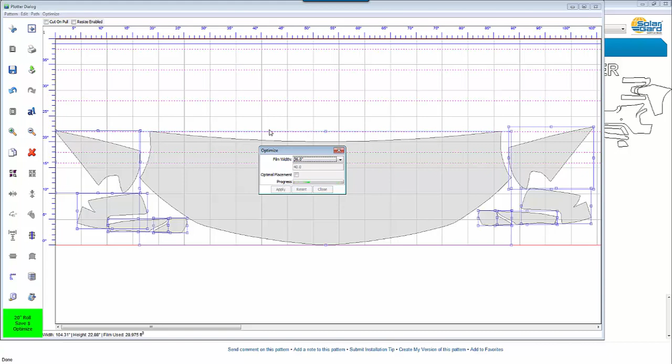So to do that, you just go to the Optimize and then click on 36-inch, and we'll just uncheck this because it takes a little bit longer for optimal placement, and click Apply, and it will optimize it for a 36-inch roll.

So to optimize this, it's as easy as just selecting the patterns, the width, and click Apply. Okay, we'll close out of this and then close out the plotter dialog.

And let's say we're going to cut this bumper here. So again, I'll click and drag a box around the bumper. Hit the cut button, it pulls it into the plotter dialog window. And as you can see, all of these sensors are included in here.

But what happens if you have a vehicle that does not have these sensors? Well, it's pretty easy. All you do is just click on the pattern and go over here to Ungroup. Click Ungroup, and what it does is it separates each part out individually.

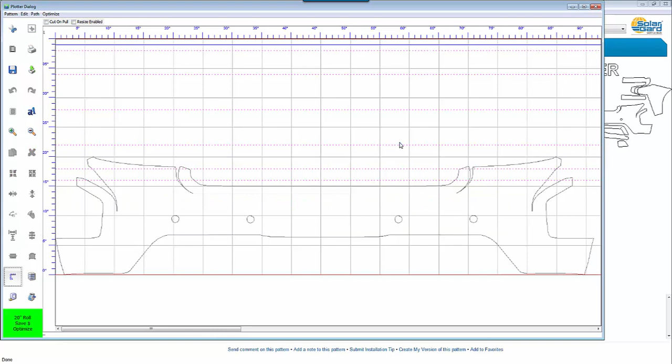So you can just click outside here, and then we'll click on the sensor there, and if you hold your Control key down, you can select multiple pieces. So we'll select all these pieces here.

And then we'll just hit the delete button, and it deletes them from the bumper.

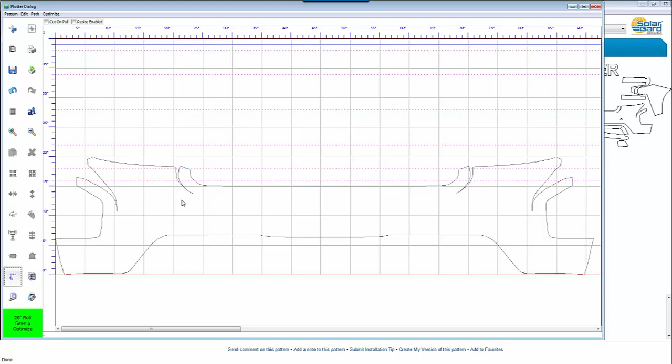Let's say you want to cut this pattern, but you only have an 18-inch roll. So we'll select it, then go down here to the Path Editor and click on that, which pulls it into the Path Edit window, and in here you can adjust it however you want.

So we'll take a ruler, click on here, and pull it down. For an 18-inch roll, we're going to go probably somewhere around 16 inches, which is right about halfway in between those two boxes.

So we'll go up here to the slice function, click on one side and then across to the other side, then go over here and do the same thing. We have to go back up and select the slice function again, click here and then click here, and that slices it there, so now we'll click apply.

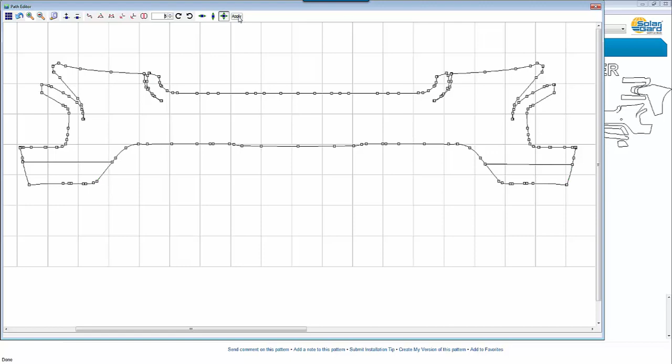And when it comes in, it's grouped, so again you're going to have to go in and ungroup it. So we'll ungroup it here and then pull these pieces out.

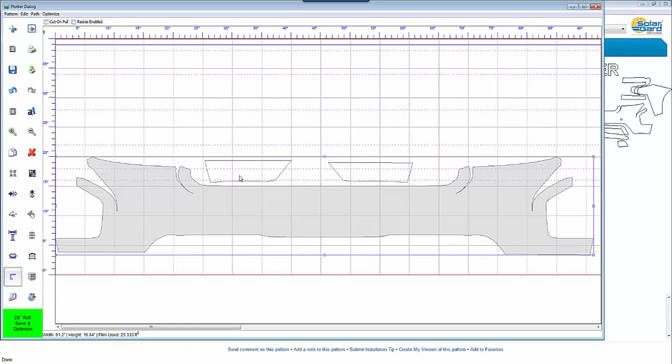And if I click on here, down here, as you can see, the height's 16.64, so it will fit on an 18-inch roll of film. Okay, so we'll close this out here.

Okay, so let's say you have a customer that wants to have the patterns wrapped. In other words, they don't want to see any seams in a pattern, so they want it wrapped around the edges. So let's say, for instance, on this hood here. We'll grab the hood and hit cut. Basically what you want to do is enlarge this so that it can wrap underneath the edges of the hood. So you go over here and click on the outline function right here.

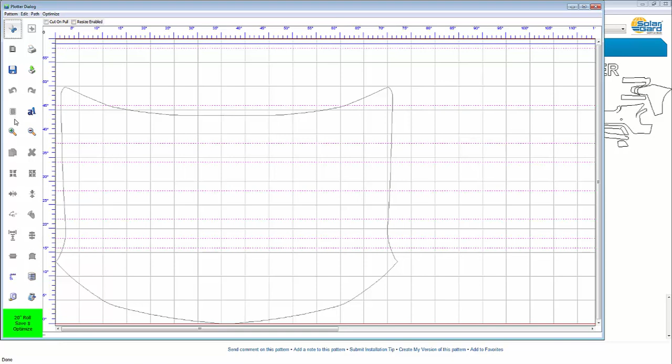In this case, it's going to enlarge it by a ½ inch, and you click wrap, and what it does is rather than throwing an outline around this, it just makes the image a ½ inch bigger all the way around so that you can wrap the edges.

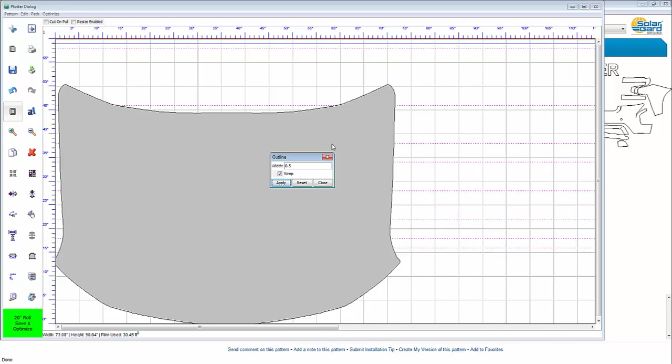One last little trick I'd like to show you. If you have dealt with paint protection before, you'll know that whenever you cut a pattern, a lot of times it's really difficult to see where the pattern has been cut. So when you try to weed it, that is separate out the excess away from the pattern, it can be really difficult, and sometimes you can even tear into a pattern and ruin a piece of material.

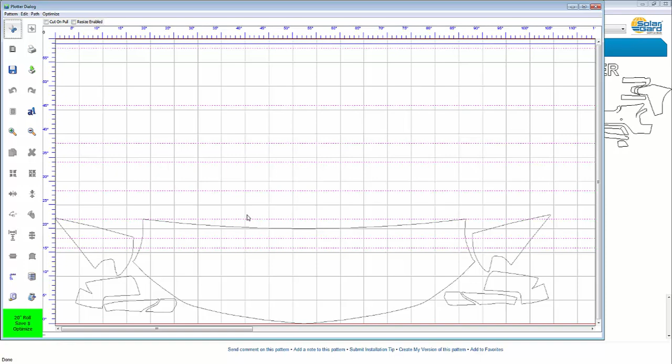A good little trick I'm going to show you here is we'll select these hood, fenders and mirrors, click the cut button, and we pull into the plotter dialog window. I'm going to hit Control A, which is going to select everything in there, and then go up here to the outline feature.

I don't really need a ½ inch, we'll just put, say, a ¼ inch outline in here and click apply. What it does is it throws an outline around each one of these parts, so when you weed it, you're not weeding out all of this excess material. All you have to do is find this outline and pull it out, and you've got your image.

The only thing is, it takes a little bit longer to cut this because basically you're cutting it twice, but it can save you a lot of time in weeding it, and also it eliminates you from possibly damaging a pattern because you didn't weed it correctly.

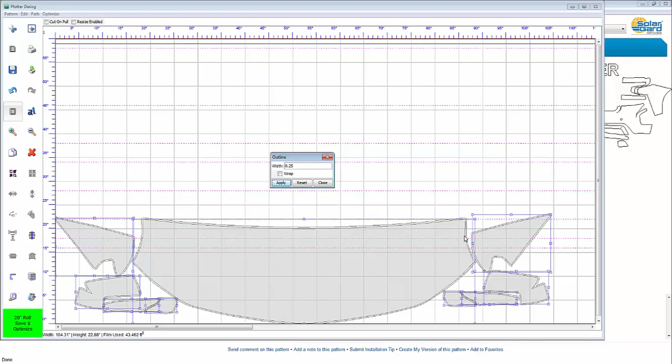And that's a quick little lesson on how you can select and cut and edit patterns and edit clear shield paint protection patterns using the ComputerCut program.